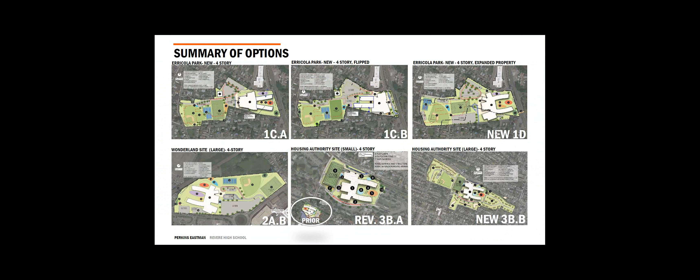So we've got a little arrow denoting that there's flexibility in how you enter the building, so it can address the parking and also include longer car queues. And then the revision to option 3BA, right in the middle bottom, which is really just flipping the building around. And then the expanded site 3B. So those are the six.

I'll spend a little bit of time zooming in. You can see this is pretty much as we presented before, with the exception of keeping track of the delta. We have 395 surface parking spaces, so the remainder would be going under the building. We've highlighted the approximate area. It doesn't mean it necessarily goes underneath the classroom wings, but you can see we've got a blue dashed outline that shows the approximate area we'd need for parking. It may go to the front of the building, or we may have a drive that comes around the side of the building to get to that.

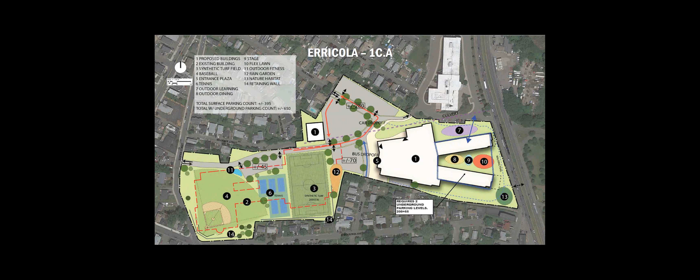You can see the 5th tennis court has been added, and otherwise some of the things we've talked about on this site remain. It is a little tight, a little pushed up to the highway. You can see the synthetic field and the ball field are really pinched pretty tightly between the access road and what would be retaining walls to the south, number 14, denoting retaining walls. So a little bit of concern there. We're pretty tight, and you really don't want a field that kind of runs into a wall. These are all diagrammatic at this point, but you can see the constraints we're dealing with.

Next option is the flip version. Pretty much the same conditions on site, 5th tennis court, pretty tight fields. In this case, the entry is off of American Legion Highway, and you can see it's got limited circulation up front. We're showing that as the bus drop-off. The academic wings are highlighted with a blue dotted line, and that would be underground parking to supplement the 350 spaces that are on the surface.

This one, you'll see when we get to the pros and cons, doesn't seem to be adding value. In fact, it really kind of separates the face of the building from the fields and the parking. The parking is around the back of the building, as you can see.

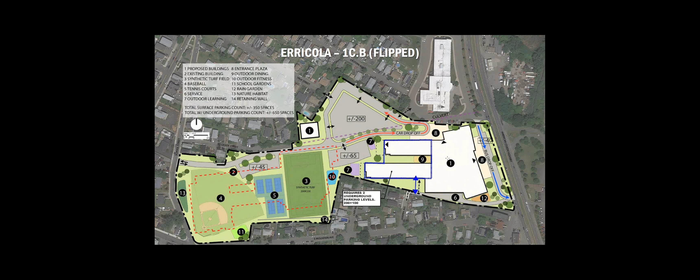So what we did is we looked at the Erricola and taking several portions of land. You can see here the black dotted line represents the existing site, and there's a little bit of area to the northwest that, if several properties there were acquired, would allow us to use the existing roadway as the inlet into the school. That also gives a little bit more buffer space for the fields and allows some additional parking to come in.

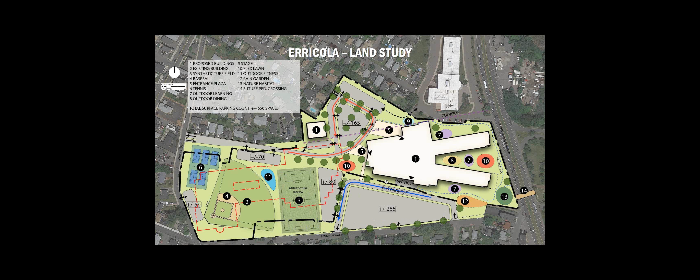Likewise, taking some of the properties to the south—right here to the south, including this large triangular piece—would allow us to again increase whether it's parking or the building. This was just a study to show what we could do keeping the existing conditions. We don't actually think of this as an option, but more as a study. We would hate to see these properties taken only to be used for some landscape or parking elements. The logic here, though, was that maybe you want to keep the building off of those properties so that you can ensure you can start construction while the land is being secured.

But I think we all believe this next option, 1D, would be the best use of any acquired land. You can see the building is able to better utilize the site, creating a better interior condition with the heart of the school. It moves a little bit off of the highway, moves inboard a little bit, and creates a lot more pleasant outdoor learning landscape and spaces for the school. In this case, we're able to again increase some of the surface parking and definitely provide relief to the fields. Actually, in this total, you can get 650 spaces on the surface, which would avoid needing a structure.

The next update on the Wonderland site, you can see here we've modified the building. The entry could be, as we're showing here, from the side, or it could also come in a little bit more from the north. The administration is right in the middle, so either one of these could be the main entry.

Here we were also able to technically get all the parking as surface parking, maintaining the separate bus and car loop, and again, the 5 tennis courts and the 2 fields.

Here we're showing, just suggesting some pathways or connections to what might be the crossings. There are 2 natural points where, if there is a future rail station and or any kind of pedestrian crossing built over the rails, it seems like it might occur at the end of the existing street up here in the north corner of the site.

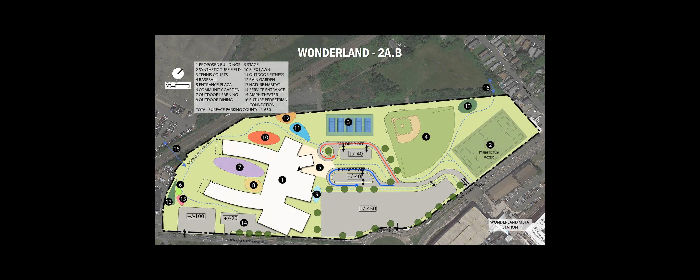And then the last couple of options are showing the Housing Authority site, small version. So this is what it would take just to build the building. Underground parking, including parking underneath the synthetic turf field. So technically we would get field space as well as the parking and the building in a kind of a consolidated footprint.

Here we get 300 spaces that are surface, but that's including what's underneath the turf field. So it is still structured parking. There are 75 kind of roadway parking spaces, and the rest would be underneath the building.

Again, you can see here the prior plan was flipped. Unlike the other options where the flip was important to how you approach or access the site, it's really not a driver here. So we really think of this as an improvement to the plan.

We want to make sure that we're connecting the gymnasium to the field space. Field space would be up on what would be the second floor, and that's exactly where the gymnasium is. So it works out quite nice.

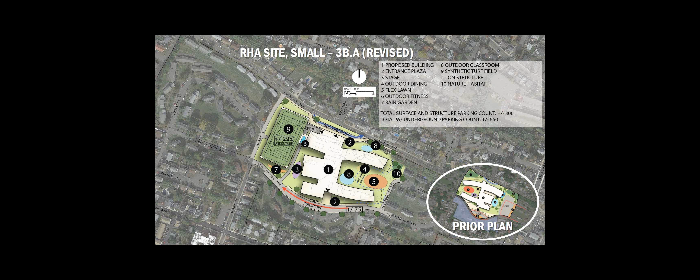And then the expanded version, same footprint, same connection to the synthetic turf field. Here you can see the site now shows, in addition to the building, an additional ball field. And we've gone through and done a little bit of a study to see how some of the housing units, including senior living, might be phased or constructed on the site to reduce the number of units that might need to be located off-site. That's something we can go into in a little bit.

But before we do that, we've run through these at a high level, happy to take questions. I'll say before any questions that we're updating the pros and cons on all these options. It used to be that the 4-story was considered advantageous in being a consolidated footprint. Now that they're all 4-story plans, that's been taken out as a factor or consideration.

What I found interesting as Dawn and I were putting these together is that, for the most part, if you move left to right on these options, you can see the positives tend to grow and the negatives tend to shrink. That's not really a measure entirely of a preferred plan because the comments here aren't necessarily equal weight. It's just an interesting observation, and I encourage everybody—we'll make sure we get this into everybody's hands as an update, and we're happy to learn more about what should be some of the criteria we're evaluating these options by.

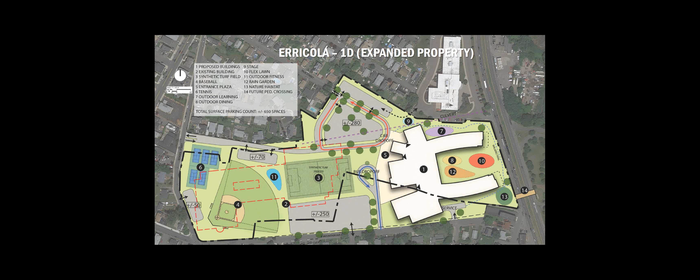Got it. And then on the pluses and minuses slide, I noticed that the large RHA, 3BB, has a replacement of 84 units, and the small version has 154 housing units. Are those net replacement numbers?

That's probably a good segue. That may be based on slightly earlier information. That's something we're just about to jump into if we want to go there. Okay, yeah, we can. No, good eye, Mayor, and that's sort of where we're going next.

Just to preamble some of this, we're going to go through the work that Perkins Eastman did to figure out the jigsaw puzzle of who would need to go off-site, what type of units, and how we could phase on-site. They did some really awesome work there. We're then going to talk about schedule a little bit. Both of those, I think, put us back in front of the Housing Authority Board in the next coming months.

So a lot of this is just ideas, I just want to throw that out there again. All this housing relocation is not under the purview of this project, but the ideas Perkins Eastman have shown here are going to set up a time frame of when this would all need to happen. So we're sort of doing the thinking - we're just not in control of the potential housing replacement project. Quick question.

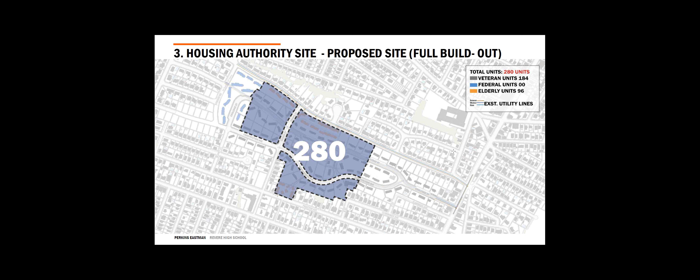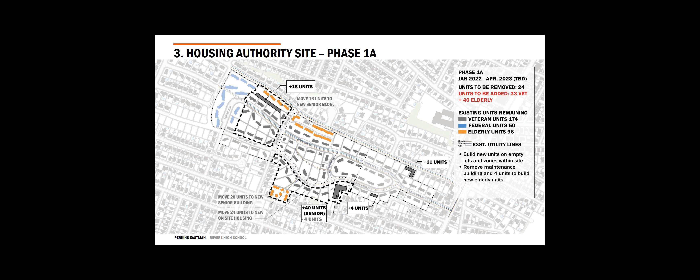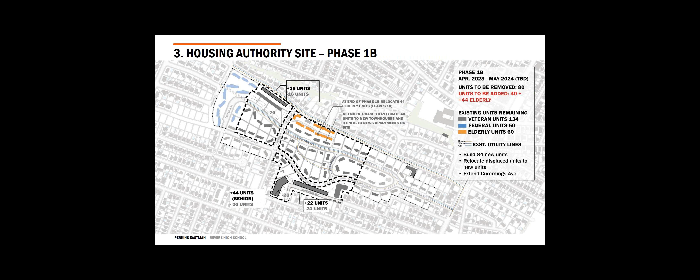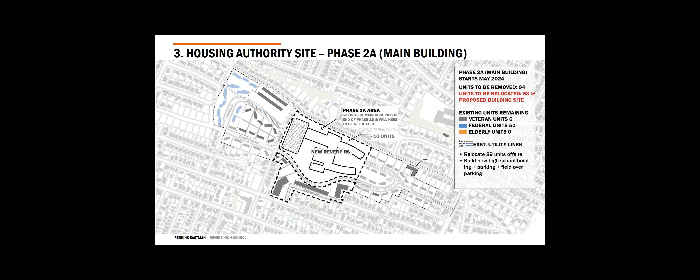And that's the end game. That's the end drawing right there, showing the new high school with the phase 2A area, which would be that part off of Coolidge, which in the end we would relocate. I think there's one more slide past this. Yep, where we realign Coolidge so it pushes away so the baseball field can go in there. And that finishes up the phasing of the project.

And I think this also allows you to do all this at one time. You really could combine—there's a possibility of combining 2A and 2B into one final site phase.

This is just a little summary that we'd like to vet as an idea, and then we're going to run this through some of the folks that Mayor Arrigo has working with us. I think a refined version of this idea is probably what should go to the next Housing Authority meeting, and we really need to get some sort of temperature read on whether this is one way to skin the cat, so to speak. We just needed to vet whether this is possible, and how many people would go off site.

Dan, you sort of alluded to schedule, and we don't have the schedule for all these phases laid out in a nice graphic way yet. But if this multi-sequence on the screen right now were able to start in earnest—call it January—team together, funding, people moving, a real version of this design going, a real process going—the schedule should be pretty similar to what we presented to you for this option at PSR.

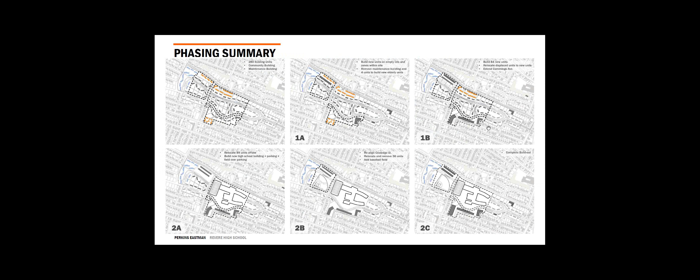Quickly going back to Dr. Kelly's question - these will evolve a little bit as we refine these schedules and put the final budgets for this phase in front of you. But with the Wonderland and existing site options, we're still pretty confident you'd be talking about a move into the new building in summer 2026. The assumption with the housing authority versions - Wonderland and existing site, even if existing site includes eminent domain - the housing authority timeframe was basically 2 years after that, so fall 2028 was the goal. The idea would be that we'd have control of the housing authority site enough to start building the high school by the end of 2025, and we'd be able to have that building open winter 28-29. So about 2.5 years longer than the Wonderland or existing site option was in the last phase, and I think that's going to pan out to be the case for this phase as well.

And Brian, is that timeline just for phase one? Yes. And then phase 2 would happen after that? No, no, that would be the whole kit and caboodle, the whole thing would be one. Yes, you're able to do it with these maneuvers. You really can do phase 1 and phase 2, the building and the field adjacent, in one shot. It's one of the nice things about it - it really does allow you to clear the whole site for the final build out, rather than breaking it into pieces.

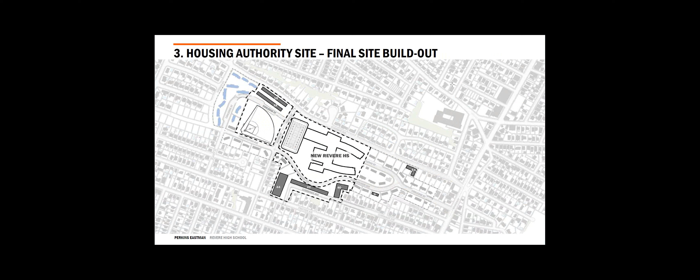Yeah, the two senior living buildings, that's a pretty standard typology to be 3-4 stories with an elevator and units on each floor, a certain number per community. And then that 11 unit building is also a smaller, low slung apartment building, but the rest of them are townhouses.

I do wonder, to Joe's point, I know they wouldn't want a 12-story high-rise, but might they be amenable to a 6-story building? My impression is no. I'd like more input on that, and that's why I want to get in front of them and ask more questions. But my impression was townhouse or bust.

So I feel like we're pushing it a bit with this, which is why I want to get a reaction from them. I'd like to bring this presentation and Dan to the next RHA meeting and run them through this and see whether this can be embraced or pushed back upon. But we feel like we're pushing it as far as our initial read allowed us.

We also felt the typology in the neighborhoods surrounding the fabric supported closer, more dense townhouse kind of housing. But there aren't a lot. That big white building at the bottom is a larger scale building, and that's why we felt building that senior living building wasn't out of character for the area. The one over there is not really out of character either, but putting larger buildings on this site might be a little out of character with the area it's in.

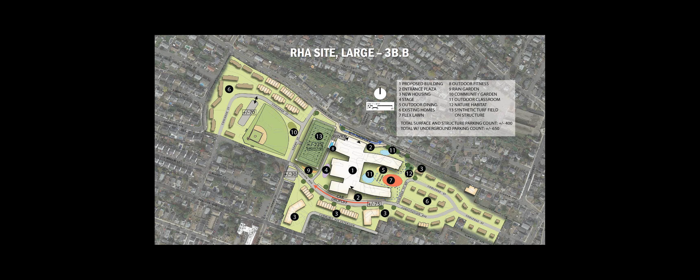Bob and Dan, was that most of what you guys had? Yeah, I think that's it.